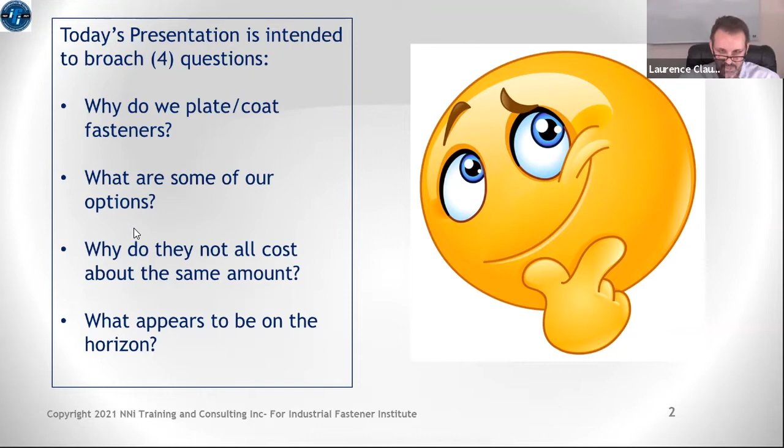All right, so 4 reasons why we plate and coat fasteners. Now, quite frankly, there's far more than 4 reasons, but I want to focus on what I consider to be sort of the top 4. If we were going to be contestants on the game show Family Feud, if you've ever watched that show, you've heard Steve Harvey say, we surveyed 100 people and their top answers are on the board.

And if we were playing that game show and this question came up, why do we plate and coat fasteners? I'd buzz in there and my answer would be corrosion protection. I'm sure that I would get the number 1 answer for that. By far, the primary reason we plate and coat fasteners is to protect them, to keep them from failing us in the applications that the customer has purchased to put them in. But some other reasons would be friction modification, and there's really sort of two aspects to this.

One reason is that some customers who assemble parts occasionally have issues with things like galling or cross-threading. Having some friction modification might drastically reduce the possibility of having those problems.

But more often, we've seen a real rise in interest in friction modification in platings and coatings for customers that do very high volume assembly and want to limit the erraticness of their assembly operations. They want to reduce the frictional variation in the torque tension relationship as they put fasteners in.

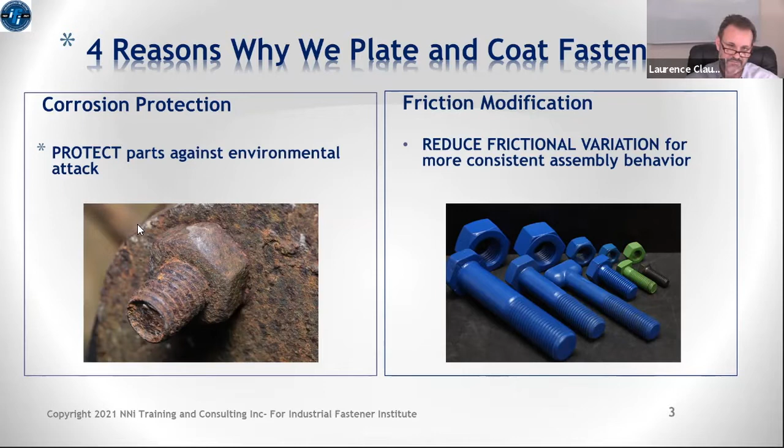Appearance is always a reason that people choose some of these platings or coatings. Anytime a customer has a part that they have to put in view of their customers, they want that part to look good. They don't want it to look lousy or rusty. So appearance can often be a key reason why a customer would choose one plating or coating over another.

And then identification. The example in this slide is actually a brake caliper. If you don't work on cars, you might not recognize that component. That's the device that, when you push on your brake pedal, squeezes the rotor to stop the wheel from turning. You can't see it in this picture, but that brake caliper slides on two colored pins, the silver left-hand pin and the gold right-hand pin.

When we look at those two pins, those are both basically cold-headed fasteners. From the front view they look pretty much identical - same size head, same shape of head, same type of flange or washer. So if they looked identical to one another, there's really no good way to distinguish between the two, because everything below the head might be completely different.

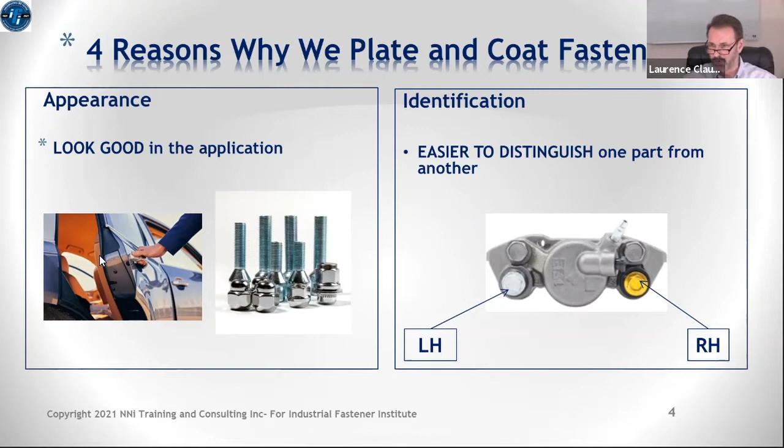I could spend a lot of time talking about all sorts of different examples of that. So how do these platings and coatings work, or how are they intended to work? What basically drives them? There are four different types of primary protective mechanisms that platings and coatings can fall into.

The first one is what's called a barrier protective mechanism, or barrier coating. As the word suggests, it creates a barrier that blocks the corroding material from reaching the base metal. A good example of a barrier coating would be anything that is painted.

Second on the list is sacrificial, sometimes referred to as galvanic mechanism. This is where the plating or coating basically sacrifices itself before the base metal will start to corrode. Zinc electroplating is a fine example of a sacrificial type of protective mechanism. It works as long as there's zinc coating to sacrifice itself, but as soon as the zinc coating wears thin and starts to expose areas of the base metal, the part will start to corrode.

Actually any one of these mechanisms, once a barrier is interrupted, becomes vulnerable - the base metal becomes vulnerable. If a sacrificial one just wears out over time, most of these mechanisms are things that just prolong the part's life.

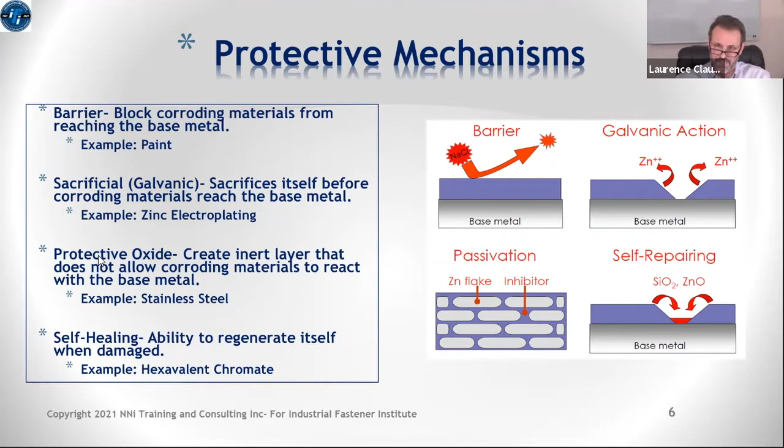The finishes that employ, at least as a constituent of their protective mechanism, self-healing mechanisms are easily the best in the list as far as from a protectant standpoint.

There's lots of platings and coatings and finishes out there that we use on fasteners. This slide just gives you an idea of some of the general categories and some of the specific finishes that fall in those general categories. But if we looked at all the different variations of each of these, including ones not listed on this slide, we would see there are hundreds, if not thousands, of different combinations and variations of platings and coatings employed on fasteners.

We're going to touch on most of these main topics, at least an example out of most of them, in the next couple of slides.

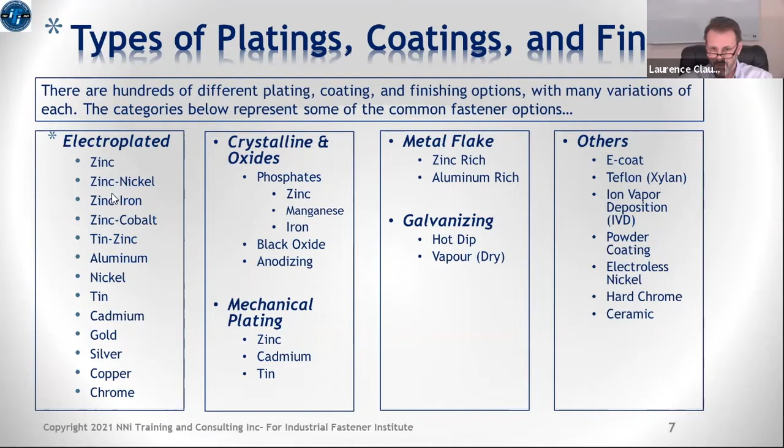Before I do that, just a quick look at who is using what. I'm assuming my audience here has primary customers that serve specific market interests. Some of your business may be almost all automotive based, or it might be a mix of automotive and industrial or defense work. So I'm going to show you the main industry segments for fasteners and what some of the more common platings and coatings are.

In automotive, the primary coatings and platings are a couple of the zinc electroplatings, both zinc and zinc alloy electroplatings, the metal flake platings, phosphate coatings, and electrophoretic coatings, which is electrically applied paint, otherwise known as E-coat.

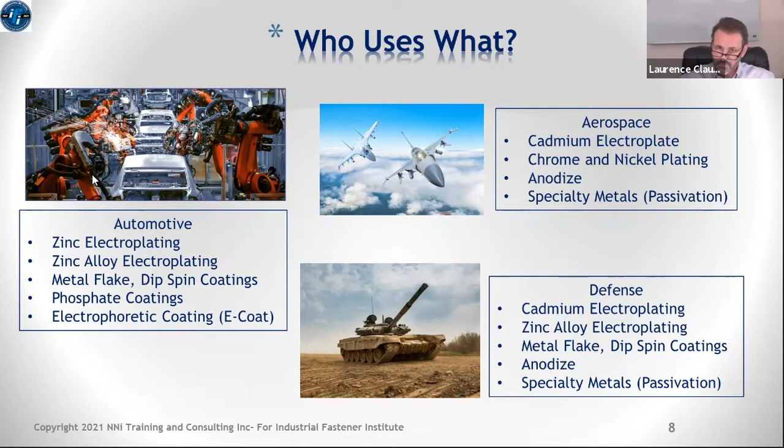On the industrial side, industrial covers a huge wide range of different options. So this is not all inclusive of every finish, but we do see a heavy concentration of zinc electroplating, metal flake platings, phosphate and black oxide coatings, and again use of stainless steel in industrial applications.

In construction, this is where we see hot dip galvanizing coming in as a popular choice. A lot of plain fasteners get used in construction simply because they're going to get painted, so they don't necessarily need to have a finish put on them.

In the residential construction area, we've seen a rise of ceramic and polymer coatings for things like deck screws and stuff like that.

And then I included oil and gas. I guess oil and gas is sort of a mix, maybe a subset of a little bit of construction, a little bit of industrial. I included it because it's a significant industry pocket with some unique plating and coating needs. We see a new entrant there, the Xylan coatings, which are Teflon coatings, used a lot in the oil and gas industry.

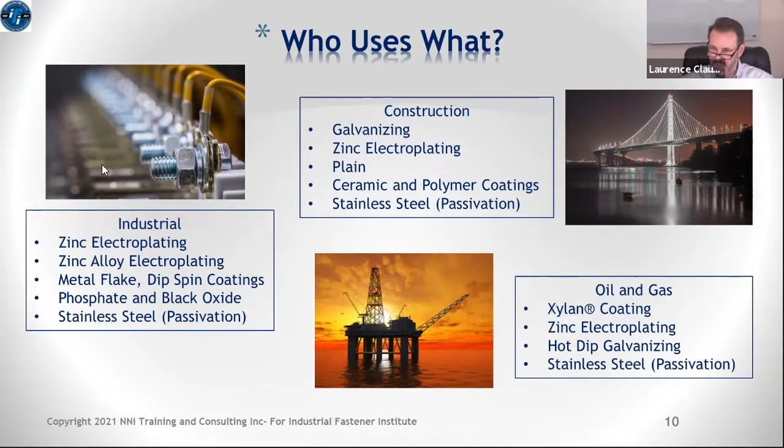All right, so let's move in and look again at some of these specific ones and learn a little bit more about each one of these.

I start out in the pole position with zinc electroplating, simply because it is by far the most commonly used plating or coating choice worldwide. I don't know that I've ever seen an actual figure or approximation of what part of the fastener market uses zinc electroplating, but in my own mind, I'd put it probably somewhere between 50 or 60% of the world's fasteners are zinc electroplated. So it is very, very commonly used.

It's commonly used because it has a number of advantages. It's cost effective, it's attractive, it supplies pretty good corrosion protection when you're using it in mild and moderate environments. Once you start to go to moderately severe and severe service environments, zinc electroplating probably doesn't hold up anymore. But most applications are more in that mild to moderate range, so it's a good fit in those areas.

Today, the natural colors are basically silver, yellow, and black. Sometimes the silver is called zinc and blue. If you're doing any business with customers that come from Europe, you've probably heard that term, zinc and blue. That's talking again about silver color. There's a definite bluish tinge to zinc. We usually call it here in the US zinc and clear. So that silver colored zinc often has a bluish tinge, and so sometimes it gets called zinc and blue. Again, a lot of advantages.

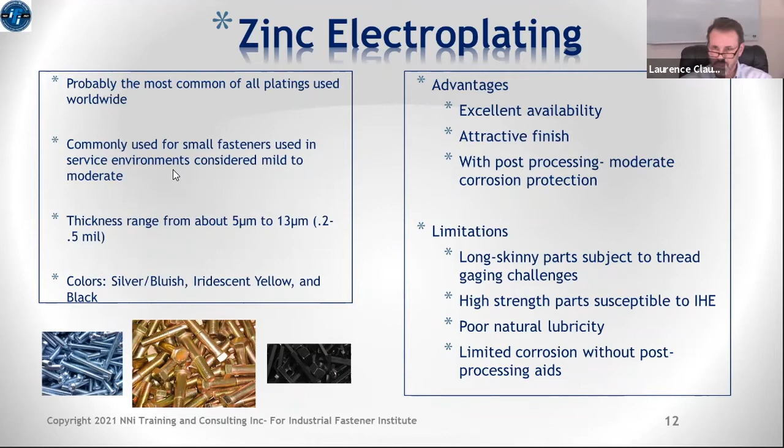There's a number of zinc alloy platings out there: zinc nickel, zinc cobalt, zinc tin, zinc iron. I'm only going to spend a minute focusing on zinc nickel, and the only reason is that it's getting a lot of play today, and has for a number of years now. The reason for that is that zinc nickel has been considered a replacement for cadmium for some time, and it seems that some of the recent studies examining it show it's one of the leading contenders for electroplatings that would be a replacement for cadmium.

And the reason for that, it has very similar electrical potential, which means that it's going to behave from a corrosion standpoint very similarly to cadmium. And there are some versions of it that have lower risk of hydrogen embrittlement than the zinc platings do. So it's sort of emerging, has been for a number of years. I don't want to make it sound like it's just emerging right now; it's actually been developing over the last probably 10 years or so, but zinc nickel continues to gain an increase in interest for people looking at options for replacing cadmium.

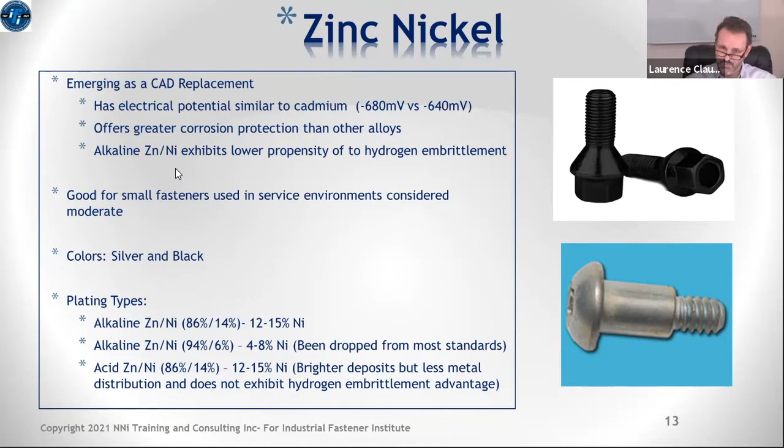When an applicator is validating that they've done this right, they're not measuring thickness, because you can't really measure thickness on this. They're measuring it by crystal size and weight. So what you normally see on a print for a phosphate requirement would be something like grams per centimeter squared, or ounces per inch squared, or some kind of measurement of weight over a prescribed surface area.

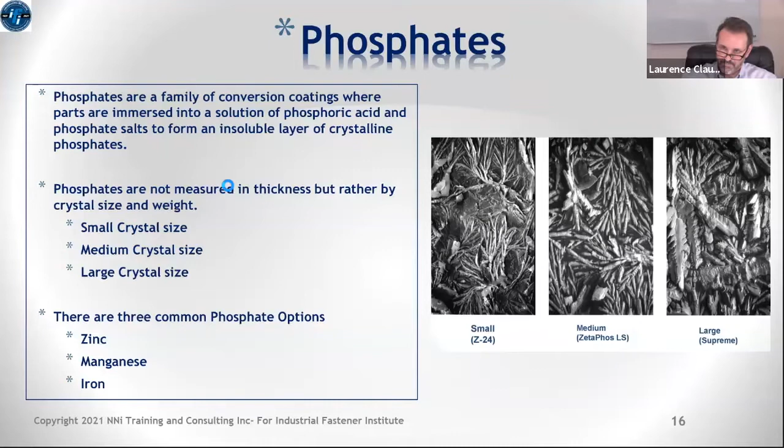All right, black oxide, quick mention of this. Black oxide is an oxide that gets put on the part when you immerse it into a heated bath of certain chemicals. The result is that you end up with an oxide called magnetite, Fe3O4, which provides a very deep, rich, attractive black color. So if you're looking for a fastener that has a really attractive black that won't chip away and show what's underneath, black oxide might be a really good choice. It gives you a nice black.

It's not going to rub off. There's no hydrogen embrittlement risk.

One of the other strong advantages of black oxide is it reduces light glare. It basically doesn't reflect. So it's very commonly used in defense applications on, say, a stainless steel part where a manufacturer of a tank doesn't want a nice shiny stainless steel fastener on the outside giving away the position of that tank.

The limitations, though, are sort of like Henry Ford had with his Model T, when he said you can have it in any color as long as it's black. That's the case here. Black oxide only comes in black, so that's your only color option. And it doesn't have particularly good corrosion protection, a little bit like phosphates. So you should only be using these in light or light-to-moderate duty applications.

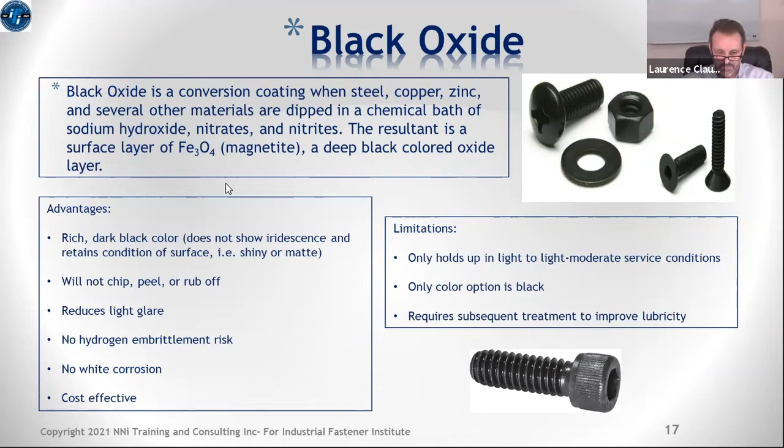Anodizing is actually a reverse plating operation.

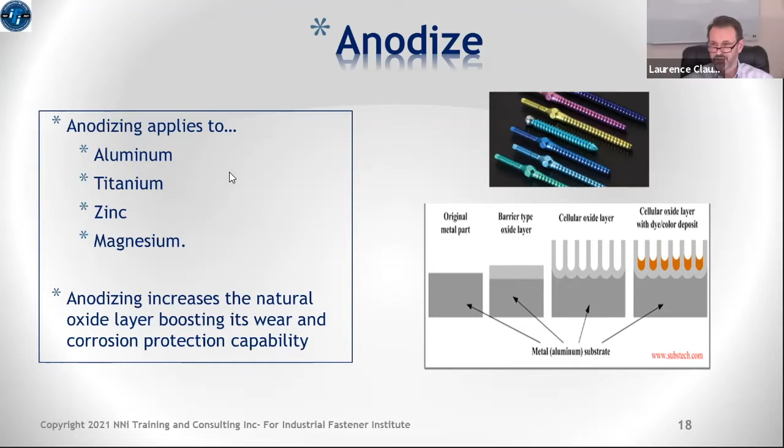We generally have to do some things to help it, and one of the things that we have to... hold on a second, I understand we're having some difficulties here. Okay, it says we're good now. Sorry, it looks like we were freezing on my end, but hopefully that will stay stable now.

All right, passivating stainless steels. Again, we want to make them even better than they are in their as-made condition. So to do that, we increase or boost the inertness of the oxide coating on top of the parts, and that is done by passivation. Passivation means to make it more passive, more electrically inert.

We do that in a heated bath. With fasteners, we do that generally in a heated bath of nitric acid or citric acid. Those are generally mild acid solutions. There are other acid solutions you can passivate in, but the majority of fasteners are done in these two.

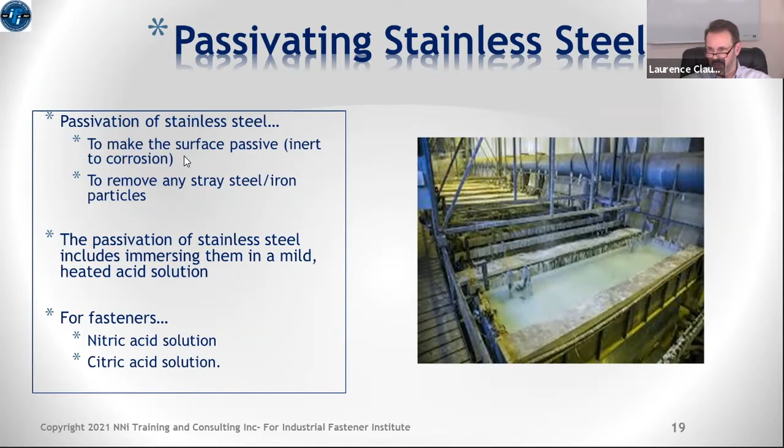All right, metal flake coatings. These are normally identified by their trade name or brand name. There are about 4 or 5 different companies predominantly working in this space. When we talk about a metal flake coating, sometimes they're also referred to as dip spin coatings, and as you'll see in a minute when I talk about how they're applied, that's how they get their name, that's the description of how they're applied. But however you're familiar with hearing about these, they are a distinct family of parts and/or coatings.

They essentially take a metal, usually zinc or aluminum, take very fine sintered powder or flakes of that metal, and mix it or embed it in a base matrix that is very much like paint. Essentially the coating gets put on and the part gets dipped into this paint-like material.

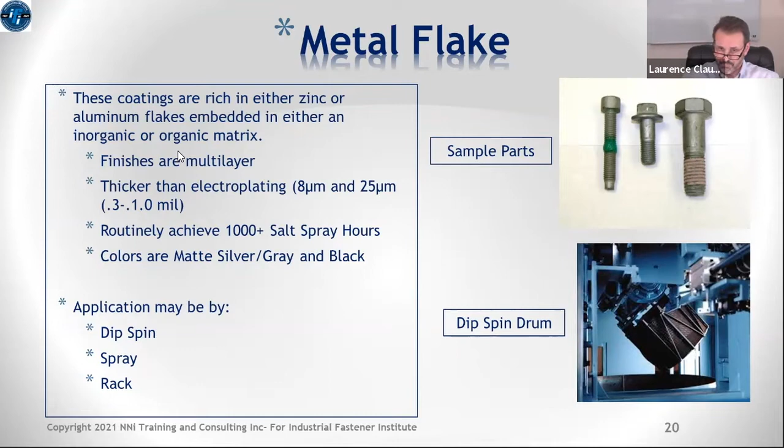Let's talk about a couple of forms of galvanizing. We have a term called mechanical galvanizing. Some people may refer to it as mechanical plating. It probably depends on the size and type of part, maybe the segment of the industry you're working in, whether you call it mechanical galvanizing or mechanical plating. But this is a process where a metal is applied to the surface of the part mechanically, meaning it is essentially pounded into place, as opposed to the electrochemical process we see in electroplating. It's capable for zinc, tin, aluminum, copper, cadmium, perhaps some other metals as well, but the common ones would be zinc and perhaps tin.

Let me just say here, because this is a very condensed presentation, I'm not really spending time on pros and cons of most of these different applications. But I do want to say this: if you have good imagery on your screen, look at the picture in the upper right corner. You can see that the picture of these parts, which are mechanical zinc plating, are relatively dull in color. And if you look closely, they almost look gritty. The surface looks sort of gritty. That's very common in mechanical plating.

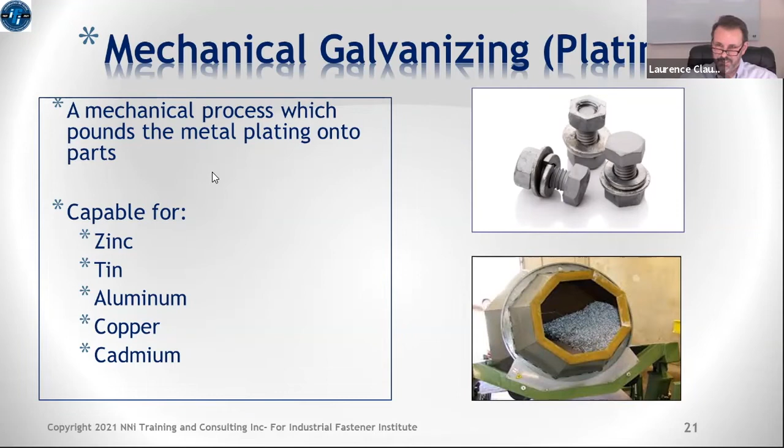Okay, hot dip galvanizing is the process where you immerse steel parts into a molten zinc bath. The temperature of the zinc reacts with the steel to create a distinctive zinc-iron alloy at that interface, and then subsequent zinc that builds up on top of that has some different type of structures and so forth. But you end up with generally very thick coatings. You can see down there, 43 to 86 microns. So generally thick, and a lot of variation in them.

That creates problems for users some of the time because of fitment issues - they can't get a nut and bolt to fit together easily. But the one thing about hot dip galvanizing is this is probably the only coating or finish that I'm aware of that really has a lot of historical data to support what it does. So it's very predictable, because there's a lot of long-term historical data that tells us what parts that are hot dip galvanized will do.

By the way, I've skipped past the middle bullet point there, but one of the other advantages of hot dip galvanizing is that once the part is actually put into service, once it's exposed to the atmosphere out there, it reacts with the oxygen and carbon dioxide in the air to form zinc oxides and zinc carbonates, and those actually boost the corrosion protection.

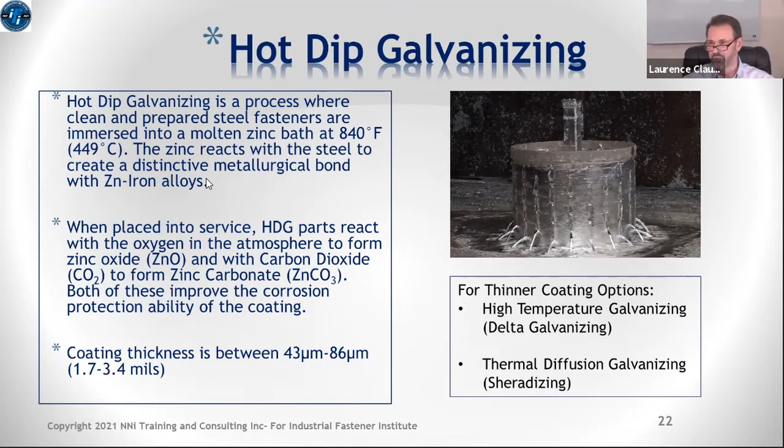Xylan, I think this is my last slide here. Xylan is, again, an interesting coating for anybody doing work in the oil and gas industries. It's a Teflon coating, essentially the same material that makes up nonstick cookware. It's very good from a lubricity standpoint, but also has excellent corrosion and chemical resistance, and it's highly favored in the oil and gas industry.

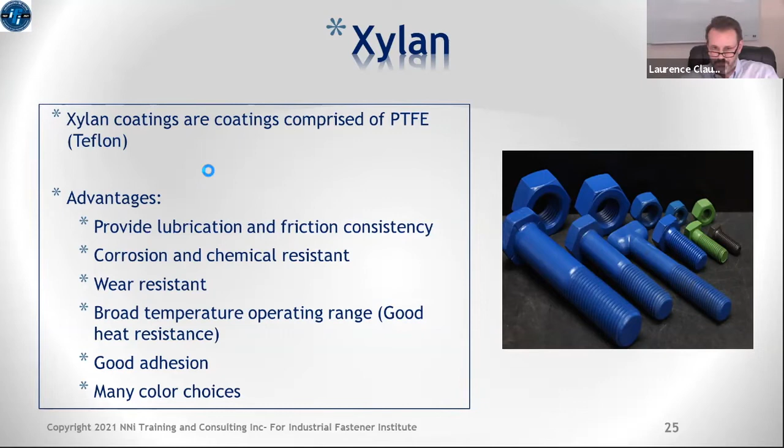All right, I really only have one slide here on cost, but a quick thing to say. I like this quote Benjamin Franklin once made: the bitterness of poor quality remains long after the sweetness of low prices are forgotten. It's really important when we're talking about platings and coatings that we choose them based on providing a solution to the customer's needs.

If the customer tells you they want the absolute cheapest thing in the world, then there are some options out there for you, but we don't want to be driven by that. If they tell you they have all these needs—it needs to do this, it needs to do this—and by the way, they don't want to pay very much for it, you need to focus on finding a finish at whatever cost it takes to accomplish those needs. Because if you choose a low cost version first, you probably won't meet the customer's needs.

So what factors affect the cost? We can go down this list in order. Raw materials—to illustrate, gold plating is obviously going to be much more expensive than zinc plating. Gold is a very expensive material, and zinc is a relatively inexpensive material.

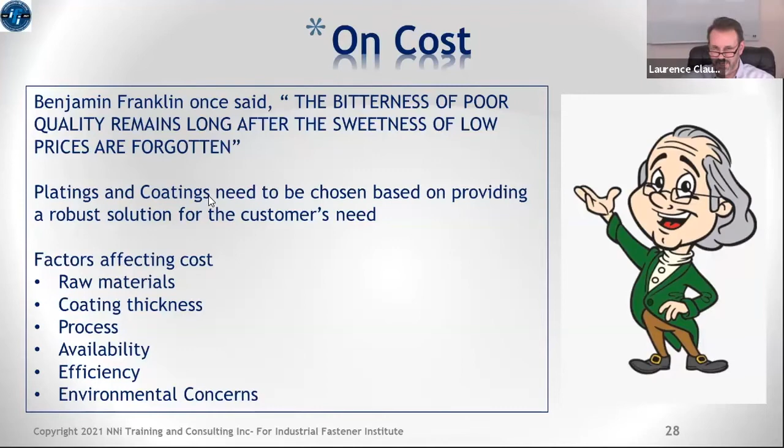And then environmental concerns. These are not always necessarily with the finish itself as much as perhaps what's left over from the process—what kind of waste is created that the applicator has to manage.

All right, so that brings us into the home stretch here. I have a couple slides titled 'stay tuned, topics to watch for.' As I go through these, some of you are going to be scratching your head, saying, Laurence, there's nothing new here, why are you talking about these? These things aren't new, and I want to stress that is true to one degree, but these are things I'm identifying that you need to make sure your radar is attuned to, because there are things happening in our industry related to these things.

And you need to make sure that something doesn't get dropped in on you by surprise that's going to change things. So let me cover these again briefly.

We'll start with cadmium replacement. For some of you, you're scratching your head because you predominantly support the automotive industry, and you're saying cadmium's been gone for 30 years, and you're absolutely right. Cadmium's gone, it's never coming back. It's not even a discussion we're ever going to have again in automotive. But it's still a very active topic in aerospace and defense. So if you are supplying parts in those arenas, cadmium replacement is still a hot topic.

There's a recent study done by the Army. Now I'm going to put recent in quotation marks, because recent probably is about almost 8-10 years ago. But a lot of these folks that have been heavy users of cadmium are trying to find alternatives. The Army undertook a pretty comprehensive study a number of years back to try to find alternatives to cadmium finishes, and they finished that. They basically identified zinc nickel and metal flake finishes, and we're starting to see some of that now starting to accelerate.

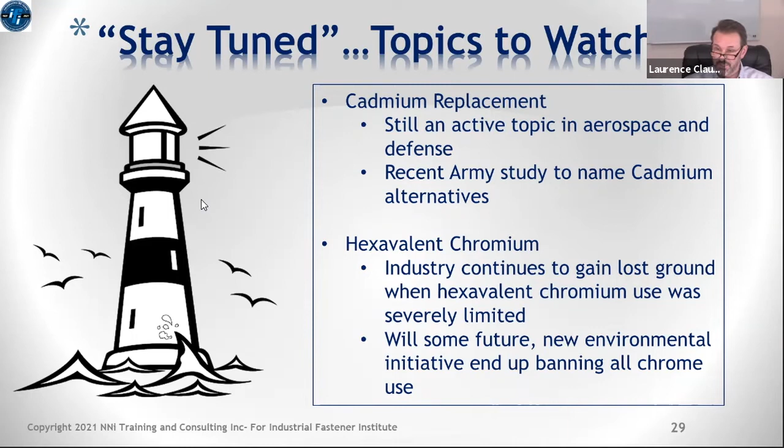The other thing I think we just need to keep an ear open about is that at the time hexavalent chromium was being eliminated, people were asking, well what about trivalent chrome? We really ought to just be designing without chrome at all. I haven't heard that discussion in a long time, certainly in a number of years. But with the new governmental administration that is perhaps more interested in environmental affairs, it's not out of the realm of possibility that these sorts of discussions might come up again. So just need to keep your ears open about that stuff.

Regulations - nothing on this list is new. The newest on this list is the very last one, California Proposition 65, which basically had a revision a couple of years ago, and it's a labeling regulation. So again, nothing really new to report here, but the reality is that none of these regulations are going away.

Over time, these things evolve. Just as whenever these standards came out and your businesses had to address the related issues, if there is a revision to any of these, you may end up having to redo that work. RoHS has had several revisions already. So you can't say we've addressed it and then totally forget about it. Keep these things on your radar screen, because they do periodically change.

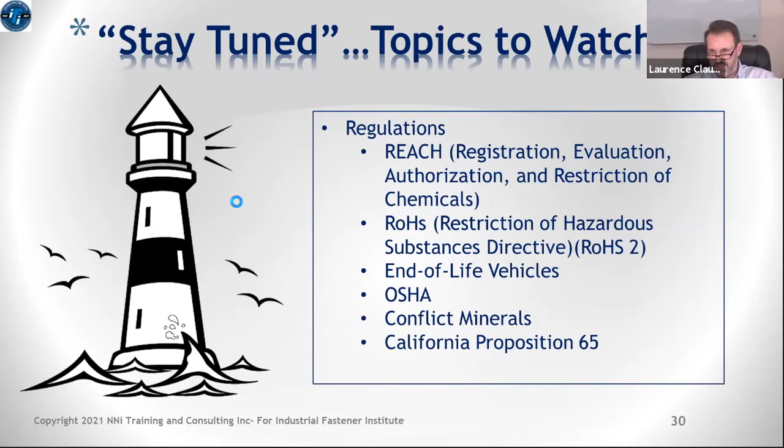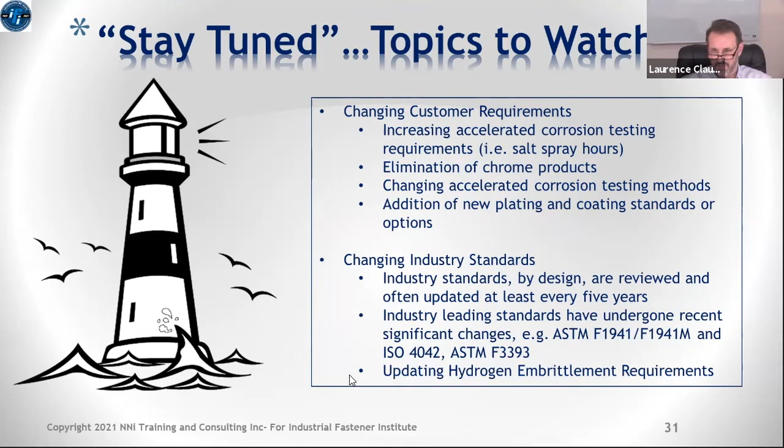Finally, some innovations going on in the surface finishing industry: improved torque tension options, with more and more work being done there. They continue to improve dip spin processing technologies to eliminate some of its limitations. I think we'll see greater interest and use of tin and tin-zinc finishes as more electric vehicles hit the roads, since those finishes are excellent for electrical connections. Zinc nickel appears to have landed as the winner for CAD replacement, and metal flake finishes are getting thinner while actually increasing salt spray hours.

Another one I was just reminded of before this session: there are now some chromates being released by chemical manufacturers that potentially allow for baking after chromating instead of before. Traditionally, you've always baked before chromating because the heat of baking destroys or damages the effectivity of the chromate finish. Now it seems they've come out with options where perhaps you don't need to take parts out of the process—you can bake after the process is completed.